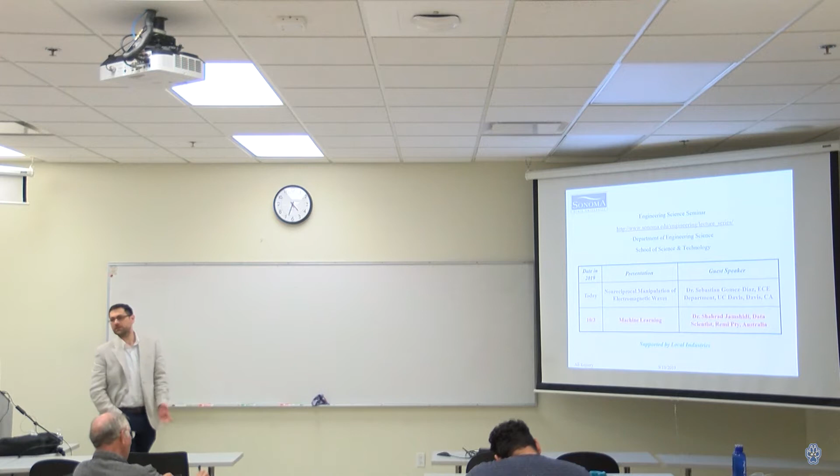Thank you very much, Dr. Kujuri, for this very nice introduction. Thank you all for coming here. My name is Sebastian, I'm assistant professor at UC Davis, and I'd like to talk today about the type of research lines we're working on in my research group. Most of what I'm going to present has actually been done by my students, so I'm just trying to help them around. I also want to make this talk pretty interactive, so if you have any questions or curiosity at any time, please stop me and I'll be very happy to talk or try to clarify.

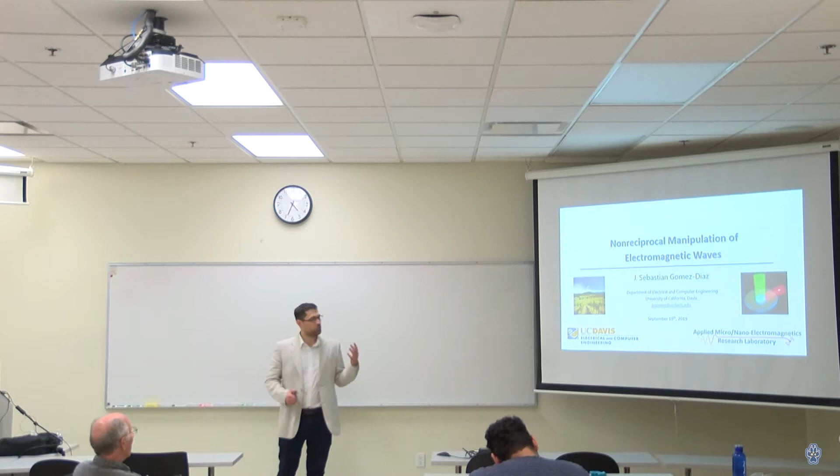What we're trying to do in my research group, one of the major research lines, is to control and manipulate non-reciprocity. Why are we doing this? Right now, most communication systems are not full duplex, meaning you transmit at one frequency and receive at a different one. All of you have a smartphone, and in it you have one antenna operating at one frequency to transmit and a different one to receive. That's because you cannot integrate a circulator to isolate these two antennas, since it requires a magnetic field. That means we are wasting a lot of electromagnetic spectrum, and we are not achieving full duplex communication.

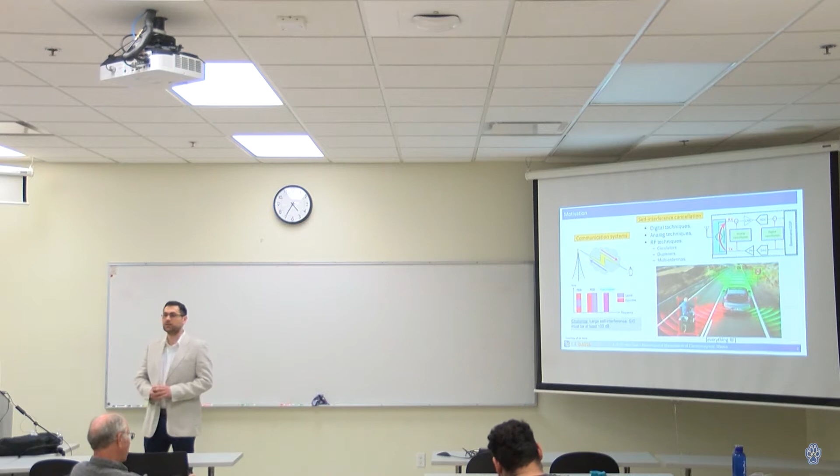Also, with more powerful radars, there is a lot of crosstalk between antennas. And if we look at the bigger picture, we are coming into a more modern and interconnected world and life where we're going to have electromagnetic waves everywhere surrounding us. The way that we control and interact with the electromagnetic wave is going to define the functionalities, the data rate, the connectivity that we have—not only for our smartphones, but for satellite communication, sensing, detection, inter-chip communication, everything.

So what we're trying to do is achieve better control of this electromagnetic wave in ways that so far are not possible. And waves can be in a broader spectrum—we can talk about radio waves, where the wavelength is very large, or we can go to optics and photonics, where the wavelength is really short.

The particular aspect I'm going to be talking about today is reciprocity. What does it mean? It means that in regular media, if I'm able to see you, you're going to be able to see me—this medium is reciprocal. That's good, but imagine you have a very powerful laser and you get a reflection somewhere; the energy is going to go back into the laser, and most likely that laser is going to be broken because you're going to burn it.

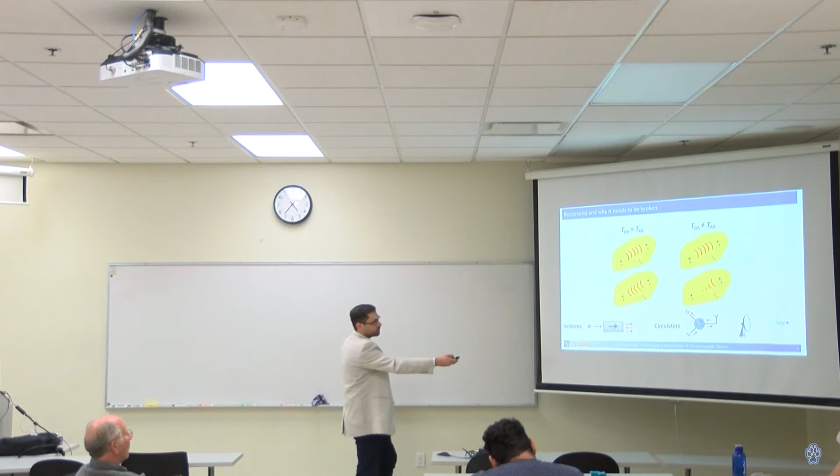Or if you have an antenna system and you want to transmit, but you are also receiving energy, you need to go through a circulator, otherwise you're going to cancel, you're going to have a very strong interference. Or for instance, if you have a primary radar system, when you send some energy, it's going to be reflected off the object you want to detect. If you have a lot of interference nearby, you're not going to be able to detect that signal. Or if you have a jamming signal, someone who really wants to disturb your communication system is going to put a lot of power in, and that's going to block your device.

Or if you have an antenna on top of a roof where there are like hundreds of antennas, they are going to interact with each other, and maybe you'll still be able to transmit, but you're going to have a lot of cross-coupling.

So there are many situations where it is very important to be able to transmit from A to B and not receive from B to A, or at least to tame or control that, not let it be something fixed. So what we want to do is control and manipulate that. That's going to be the major motivation of my talk. How can we do that?

What are the normal ways to break reciprocity? For many years, people have been using magnetic fields. You apply a static magnet, and then you align all of the electrons that are spinning in the atoms along one particular direction, and that works pretty well. They work really nicely, and we have circulators, radars, most components with magnetic materials in them. But we have a major problem.

You cannot put these magneto-optical materials in your smartphone. You cannot integrate or miniaturize them, because they are not compatible with integrated circuits. So one of the major goals in recent years in the literature and in the community has been trying to find ways to do what the magnets are doing, without any magnet. How can we do that?

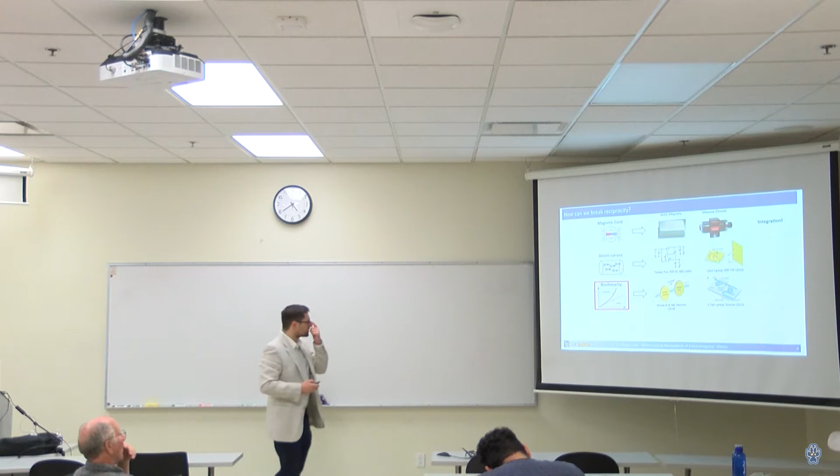And very recently, there has been a lot of trend around what is called linear or angular momentum. In order to explain this concept, I like to show this image. The origin of this concept was, apart from some theoretical works from some years ago, something very simple that happened when I was doing my postdoc in Austin.

They wanted to make a circulator in acoustics, because there was no circulator for acoustics, just a pressure wave. So what this guy did, one of my friends, who is now a professor in Europe, is he put three CPU fans that cost him like $5 or $10 inside of a ring and made an air flow. So the air was moving inside. What happened is when the sound wave came in, it just got locked to the movement of the air and followed the flow. That was the cover of Science, and I was there holding that thing in my hand. I was like, oh come on guys, that doesn't look so difficult, I should have had this idea.

But this has much stronger implications. If we can make something appear as if it is moving, we can control the way that a wave—acoustic, thermal, electromagnetic, any type of wave—behaves, in ways that were not possible before. And that's why many people are working on this now.

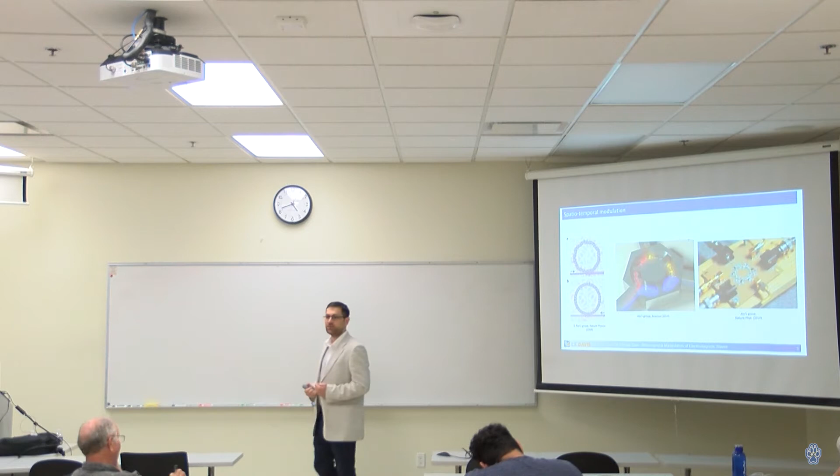I like this very much - how you can take a nice concept from acoustics and apply it to electromagnetics. I also know people now using this in thermodynamics. You can borrow from one field and apply it to a different one. It's great how much you can learn from all of these things.

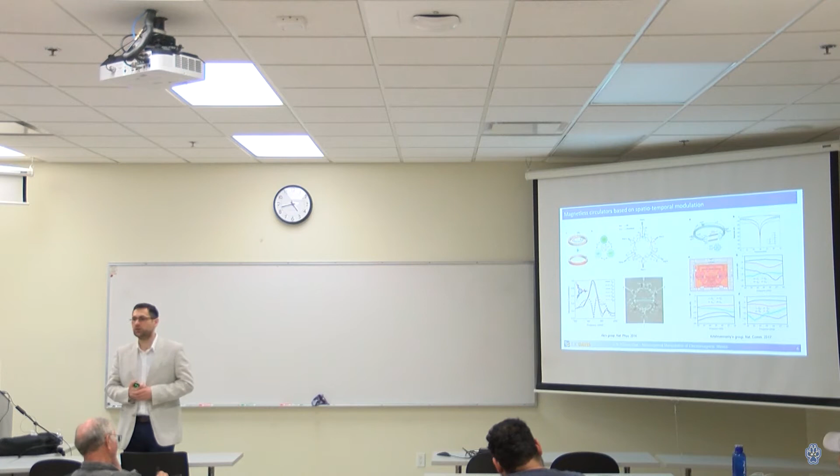Many recent works are going in this direction. People working on this came up with smart ways to modulate all these varactors and capacitors in order to reduce loss and increase isolation between the different ports of the circulator, and there have been CMOS implementations of that. In all cases, the same goal persists: build circulators that could be integrated into your smartphone without magnets. That's how the state of the art has progressed over the past year.

So what are we doing in my group? In my research group, we're starting from that concept and trying to extend it to a much broader aspect. We want to control electromagnetic waves, breaking reciprocity, and apply it to a wide variety of devices.

Circulators have already been done, but if we stay at microwave frequencies, we can make metasurfaces that interact with light in one way - but if light comes from a different direction, it goes somewhere else. So you can have lenses that focus in one direction but not the other. Or phased array antennas - some antennas able to radiate but not receive, or radiate in one direction and receive in a different one. This gives you many more functionalities. You can also have filters that act as a bandpass filter in one direction and an isolator in the other, from the same device.

This is the first block I'd like to talk about - microwave devices. These could be relatively simple, like simple PCBs that can be fabricated pretty easily.

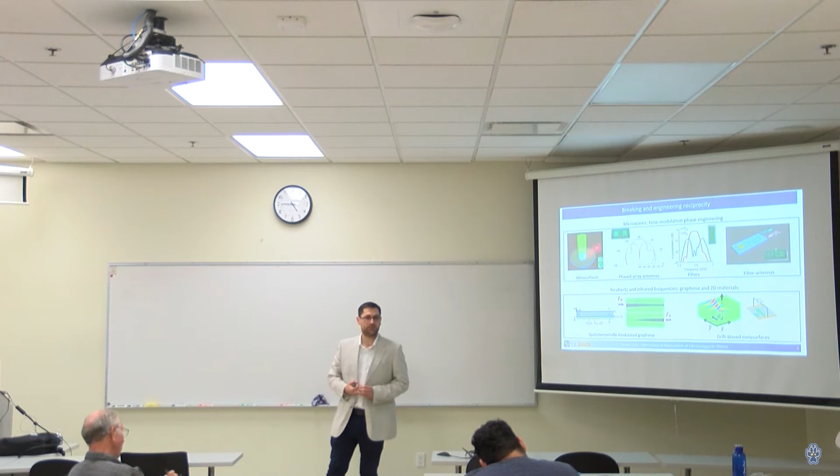The second block is about how we can push technology higher in frequency. As communication data rates increase and we need more data, people are pushing up the frequency range. There's a lot of communication happening at terahertz and infrared frequencies, and there are novel 2D materials like graphene, black phosphorus, and hexagonal boron nitride that have new properties. In this block, I'll tell you about the latest research efforts going in that direction to take advantage of these novel 2D materials with new physics, but with the same goal - getting rid of the magnet and achieving this type of functionality. So this is the context of my work.

Before we start, I want to briefly talk about two concepts. One is called the Aharonov-Bohm effect. Has anyone studied that in physics?

Okay, so imagine an electron going very close to a region where you have electric and magnetic fields inside, but outside these fields are zero. If you use classical electromagnetics, you'd assume the electron shouldn't be affected. However, if you consider the potential around these materials and do quantum mechanics analysis, the electron acquires a phase that depends on its trajectory - whether it goes in one direction or the other. This looks kind of weird. Let me try to explain it in a different way, in an easier way.

The second way this effect has been demonstrated is for photons. Before it was for a single electron, now we have it for photons. The way to explain it in this second way is that if you have a system with two states, and you want to go from one state to the other, you can do that by modulating the system, for instance with acoustics that make the system move around.

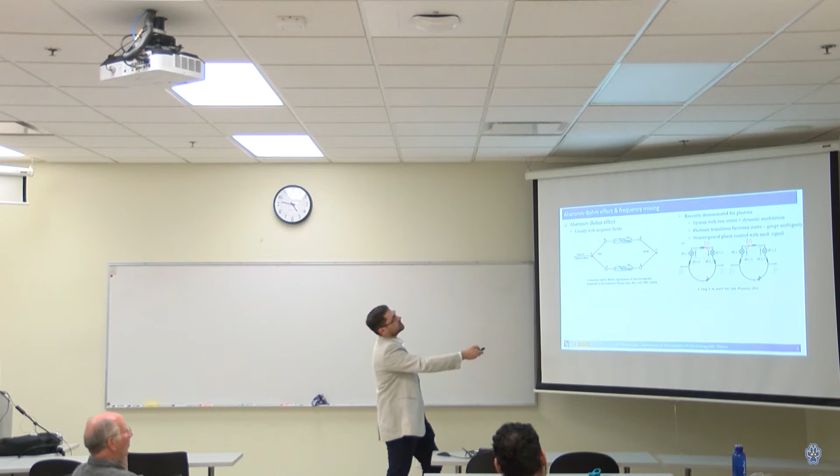But then we have a problem: what is the origin of the phase? That's going to depend on when you start the time of the modulation, and that's kind of arbitrary. We don't know. There's what is called gauge invariance, but I don't want to get into that. So if we analyze going from one state to the other and back, we're going to have some non-reciprocity in phase.

After all these things from physics, I thought this looks very complicated, and then I just went to a very simple frequency mixing explanation. If you have two signals and multiply them together, they're going to have some phase dependence. When you combine one frequency with another, they can sum, and the phase is going to be the sum of these two phases. But for the other nonlinear term, the difference component, the phase is going to be one minus the other.

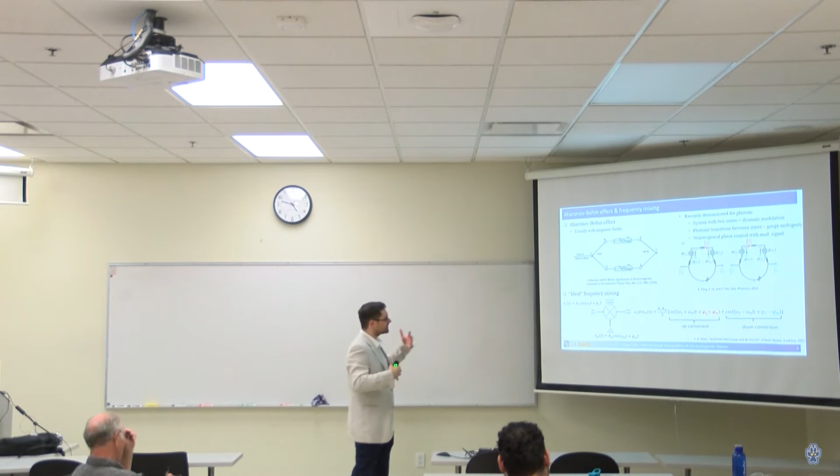So the connection with all these complicated quantum mechanics things, once you understand them, is that they're explained in a weird way, but at the end it means that if you are modulating any system, you are just changing this phase, giving you an extra degree of phase control of your system. This was like a parenthesis, because I'm going to use that later, so I just want you to remember a bit of this effect.

So let's start talking about how we can control light in a non-reciprocal manner. There have been some seminars before discussing how to control light with metasurfaces that are very thin, controlled through several unit cells, like reflectarrays. For instance, some of these structures fly on satellites combined with solar panels, so they can also behave like big antennas. You can control things at the nanoscale if you have control over the different angles. There's been a lot of work on that.

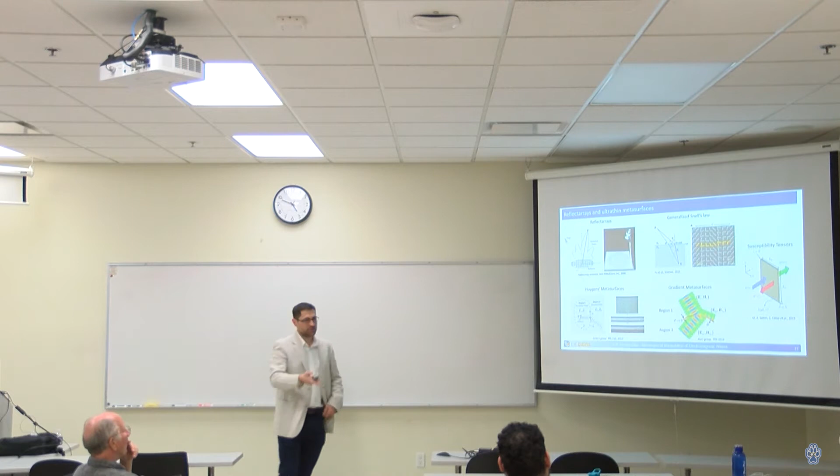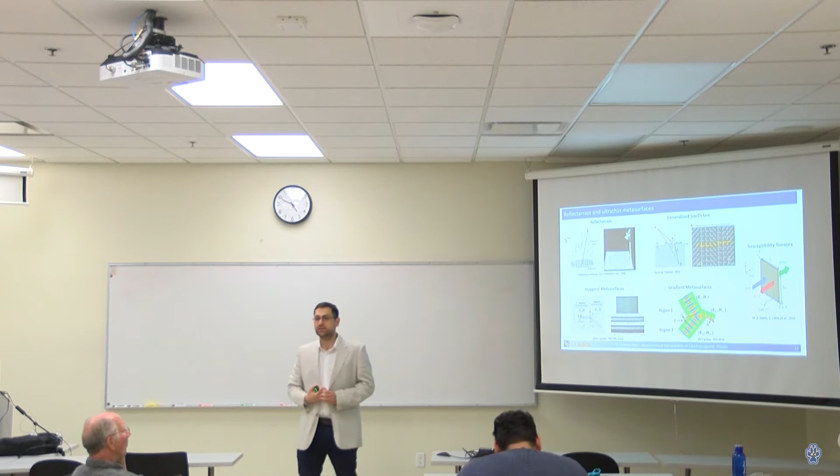For instance, Professor Salem here is very well known for establishing some of the analytical approaches to analyze these types of surfaces. And very recently, people are taking these capabilities to control the direction of propagation of light through this interface and moving into time modulation. What happens if we have an interface that is changing with time?

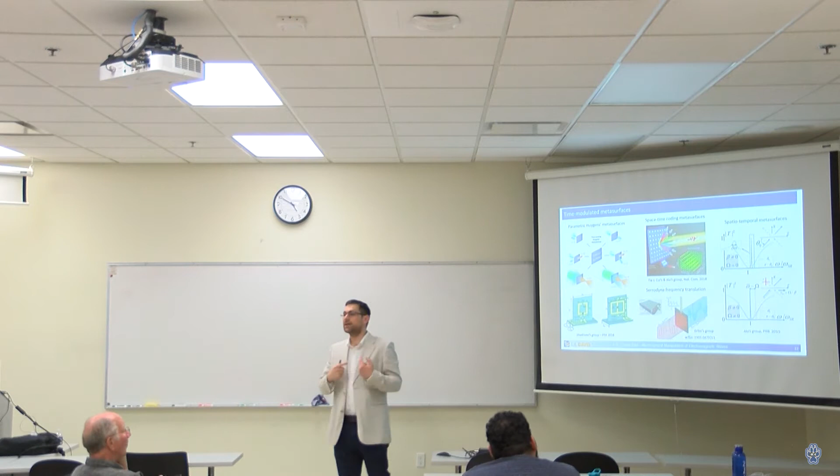So what people were able to do was have light coming from one direction and have it converted to a different frequency, or control one frequency conversion with a particular phase, or control all the different harmonics being generated, or even have a bunch of functionalities. All of these things point to one concept: we want to control light with these surfaces, applying not only a spatial variation of the different elements, but making the system move. That enables new options that we didn't have before.

And that's the key thing: you can take any device you're working on and imagine what happens if some part of the device was physically moving. You can always implement that using a varactor or any nonlinear component. So what are the implications of that? In my group, we were trying to understand what we can do with that.

For instance, we came up with this concept of non-reciprocal metasurfaces, where light coming normal to the structure is refracted in one direction, but when coming from that direction with that frequency, the light behaves differently. So for instance, if you have a reflector tracking a plane and sending information, like in a primary radar, but that plane sends a lot of energy to destroy your system or receiver, all of that energy is going to be reflected somewhere else.

Mathematically, and this is one of the very few equations I'm going to write, what happens is that each of these unit cells can be assumed to be a capacitor that is changing with time, like a simple varactor or diode that you can modulate. This capacitor changes with some frequency and phase, and all the light coming in scatters with different frequencies and to different directions, which is kind of complicated to analyze, but it gives us some basics.

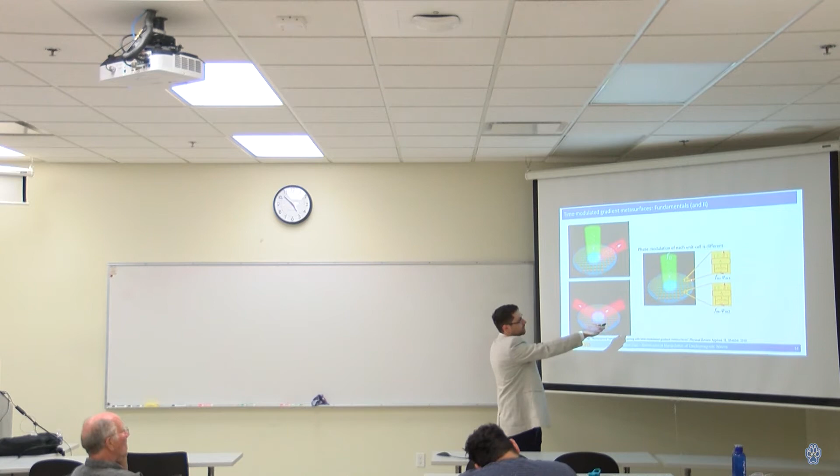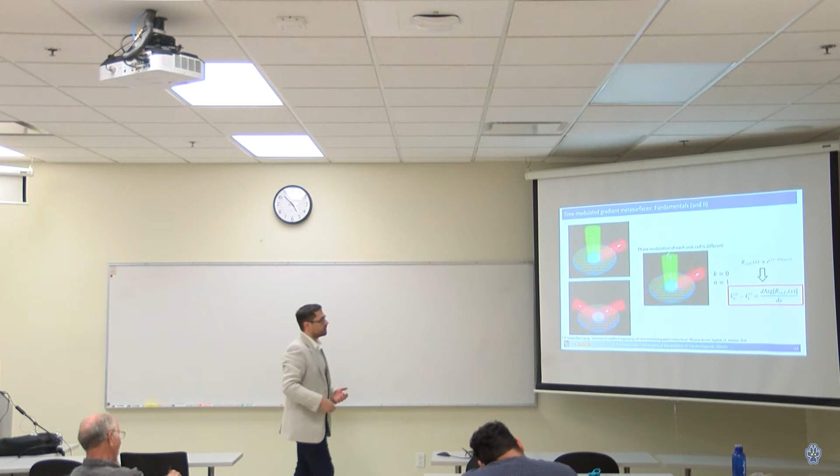What we were trying to achieve is the following: we want to take this frequency and convert it to only one other frequency, the one we actually want to radiate, and control the direction we send it. To do so, since these are unit cells being modulated, we can control the phase of that modulation. Using the concept of going up or down being plus or minus, if we control the phase of this varactor oscillating at a very low, cheap megahertz frequency, we can engineer the light to go in any direction we want, just by controlling that low frequency phase.

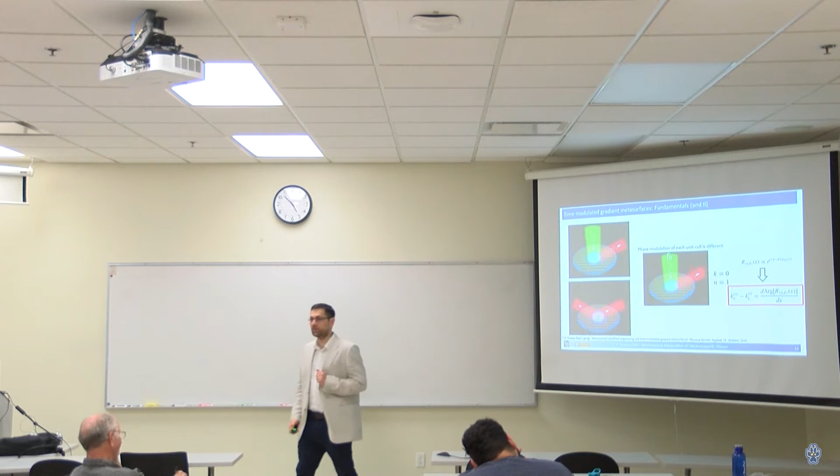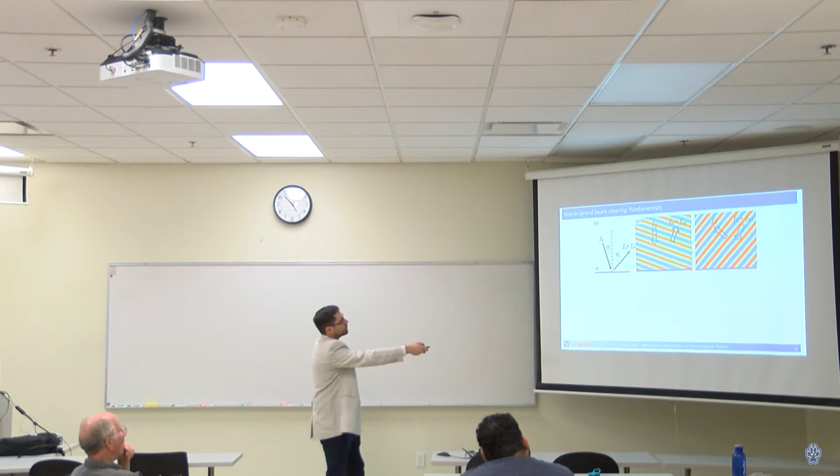If we want to understand this a bit theoretically, here we have this surface. Later I'll show you some experiments. If light comes in and this surface is modulated with some space, time, and gradient, we're going to reflect the energy into that direction. But what happens when energy comes from that direction instead? Exactly the same, but reciprocally, it goes with a different angle towards the other direction.

That's the concept. What happens if we push this further? We can change the modulation of this layer so all the energy coming from this direction goes really close to broadside. When the energy comes back, it cannot go under the surface, so you create what is called a surface plasmon—the energy gets trapped in the surface. That means you can engineer and control the light as you want.

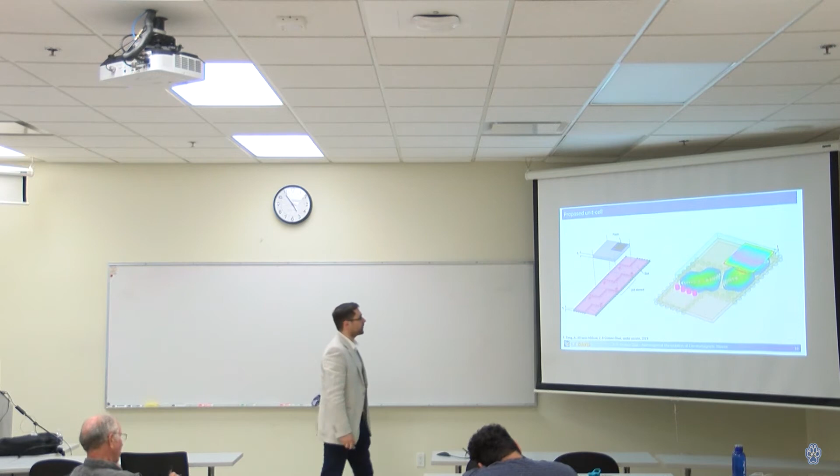We did all of this in simulation with the computer, and we were thinking, how can we do this in practice? It doesn't look very complicated. Then one of my students—because they are all great—came and said, let's modify these cells that you were working on for something else. If we can change these unit cells and make them dynamic, this is going to work.

The initial idea he had was: you have a simple patch, energy comes from the patch, enters through the slot, goes in that direction, is reflected back, goes up, and is radiated again. All of this path picks up some phase. If we can change the position of this path, we'd be able to control that phase. But if you fabricate all of this and try changing it mechanically, that will never work.

So we said, let's just add a simple varactor here. We take one of these pins and connect it to a very simple varactor—like a capacitance that changes with voltage. We apply a simple voltage, and we realize that for the frequencies they were coupling, we can control the phase however we want, and we have huge control over the phase.

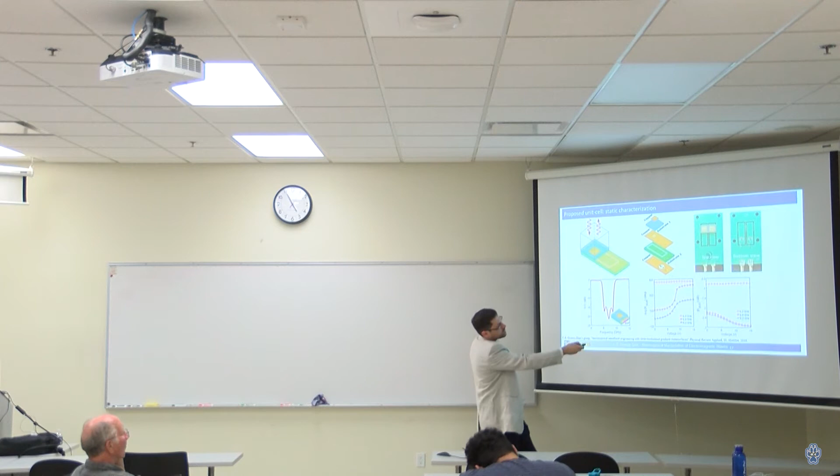So we feed this with some frequency, and we were able to go, for instance, from 9.2 to 8.6 frequencies, controlling the phase. This is exactly what I was discussing before: if we can control the phase of a very low frequency signal—like in this picture of the prototype, around 500 megahertz—we can control the phase of the entire thing, even at X-band, like 10 gigahertz satellite communication frequency. So what we were doing was only controlling the phase of the very low frequency, and through that we control the phase of the entire system.

That was one ingredient. The other one is that we want all the energy we put into the system to get converted to the other frequency that we want.

Playing around with the system, we managed to get over 10, 15 dBs of conversion. So all the energy that we put inside is going to the frequency that we want.

So what are we doing right now in this project? We're building an actual reflective radio metasurface that is going to have like 200 unit cells, because before we built a proof of concept with a single unit cell, so we know this is going to work. Now we are building the actual structure with over 200 cells.

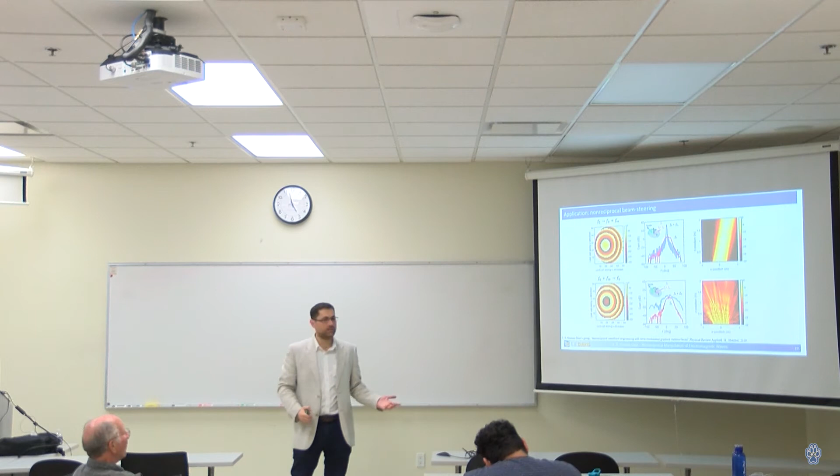But what happens in the opposite case, when the energy is coming from the same direction that it was radiated? In this case, all the energy is going to be scattered around. So what we want is, if we have some interference or jamming signal that wants to destroy our system, we're going to scatter all the power. We are not going to focus it into the receiver, so we're going to be able to handle that jamming signal in a very nice way.

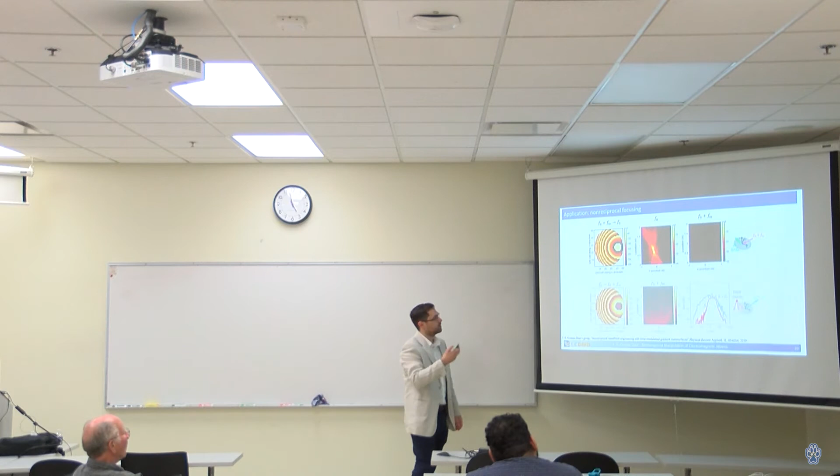We can use exactly the same system to have all the energy focus into a single spot, and when you are radiating from the spot, it's not going to radiate.

Now you are saying, yeah, this is very nice, but it looks very complicated to design all of these types of functionalities over this structure. Well, even though these results are at very high frequency, 10 or even higher, our control is over modulation frequencies of a few megahertz. Those are very simple and very cheap to control. So it is very cheap, low loss, and efficient to design 50 or 200 of these cells and control light as we want.

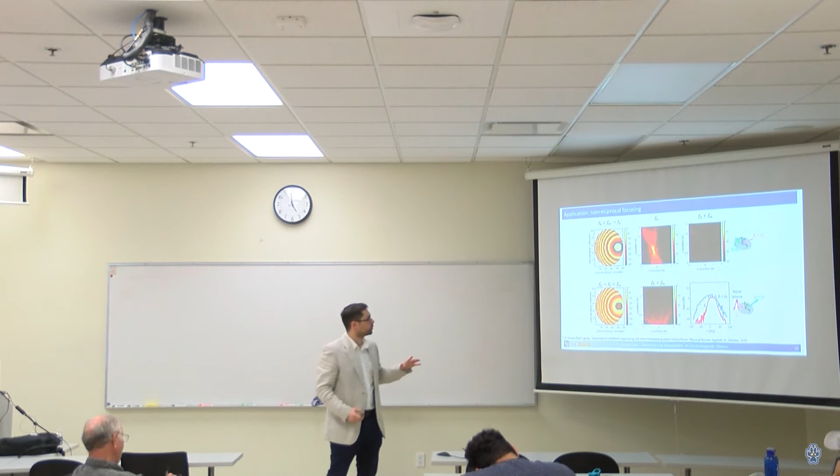So this is one way, and to my knowledge, the first proof of concept to control light over a surface independently. We can control transmission and reception, and we were interacting with beams in free space.

So that was the first project, and after we learned from that, we were saying, but what happens with communication systems like 5G, 6G, with these phased array antennas that are tracking you? Most of the antennas are not actually interacting with beams from free space. They are something that you have in your smartphone, and they are radiating.

And in new communication systems, what it's going to have is some very well-defined beams that are directed to each one of you. The concept of a phased array antenna is kind of simple: you have many antennas in a periodic arrangement, and you're controlling the phase of all of them.

Then you have some interference pattern, so you can send this to one particular direction. If you control the phases of all of these antennas, then you can send it to any other direction that you want. Why is this useful?

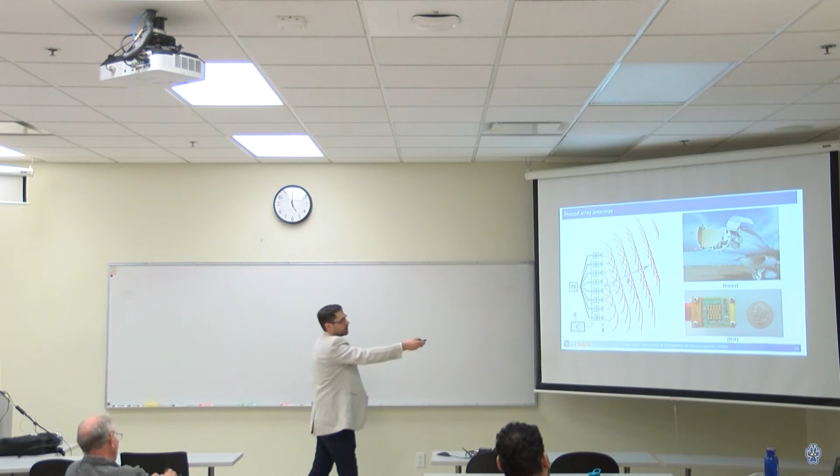Well, for instance, on a plane, you have radar made of this phased array antenna. Some time ago, most of these radars were mechanically moving, so if you see things that are always moving, that's a radar. But here, it's static, not mechanically moving. You just change the phase, and the same structure is able to track, changing very quickly, in milliseconds or probably quicker, what is going to be the direction of the beams.

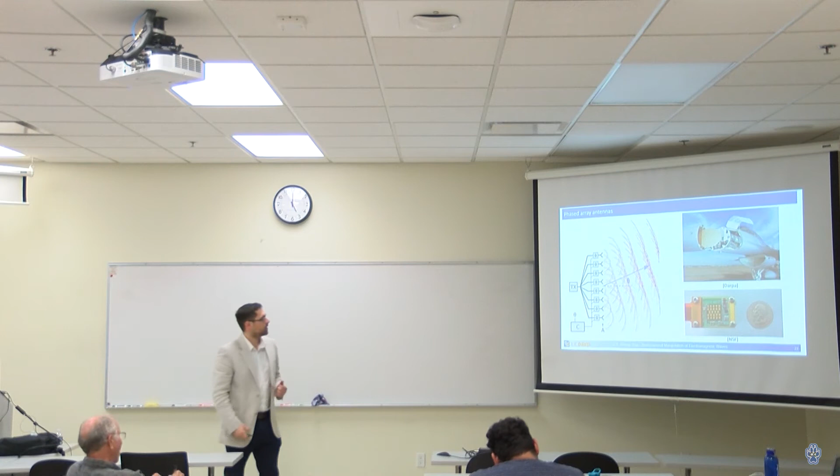But again, these phased array antennas are bounded by reciprocity: you transmit here, you receive from here. And this is what we want to break. How can we change this structure to have a non-reciprocal phased array antenna? My goal is to transmit the energy there and maybe receive from a different channel in a completely different direction in space. How can we do that?

We came up with the possibility to build non-reciprocal phased array antennas. We want to have an antenna that is modulated in time, as we have been discussing before, and it's going to be able to radiate with some particular phase due to the mixing of these two signals, and the phase of the radiation is going to be controlled by the phase of this modulation signal.

So if we do that, and we're able to do that very efficiently, we're going to control all of the radiation pattern of this phased array instead of using the frequency we're going to transmit, something very low frequency, at megahertz, something easy, cheap, and affordable and effective.

What's going to happen in reception? Well, it's going to be the opposite. We're going to receive exactly the same frequency in space, but due to the frequency mixing, this phase is going to be a down conversion. And if you remember from what we discussed some time ago, the phase is going to be opposite. That means the phase you're going to receive here is going to be different, and the interference pattern you're going to have in transmission and in reception is going to be completely different.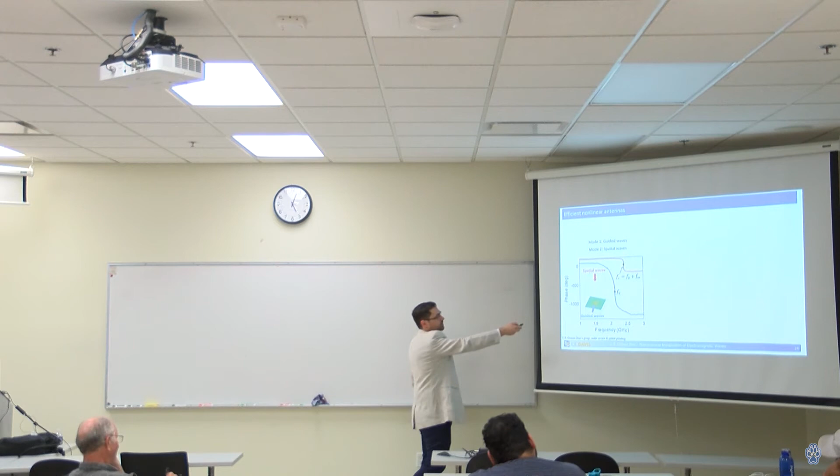And if we apply some modulation again, we want to time modulate the system, we want to go from our guided wave to the spatial wave, and then this modulation frequency, the phase, is going to control that. And again, when we were looking at that, it was like, yes, it sounds very good, but it looks very complicated to do. I want to do it in a very simple way.

So we came up with a very simple structure, like any dipole or patch antenna, just a half wavelength, and it resonates at one resonant frequency. It's kind of simple. But what happens with that simple structure if you feed it from both sides simultaneously? So you have your resonator, your dipole, and you excite from two sides. Well, this resistor models the coupling to free space, and you have like two resonators.

If you feed out of phase between one port and the other port, you are going to excite the resonance of your dipole antenna, and all the energy is going to be radiated to free space. But if you feed in phase, 0 and 0 phase on both sides, well, both of them are going to interfere in the center, and they are going to be reflected back, and the energy is not going to be radiated.

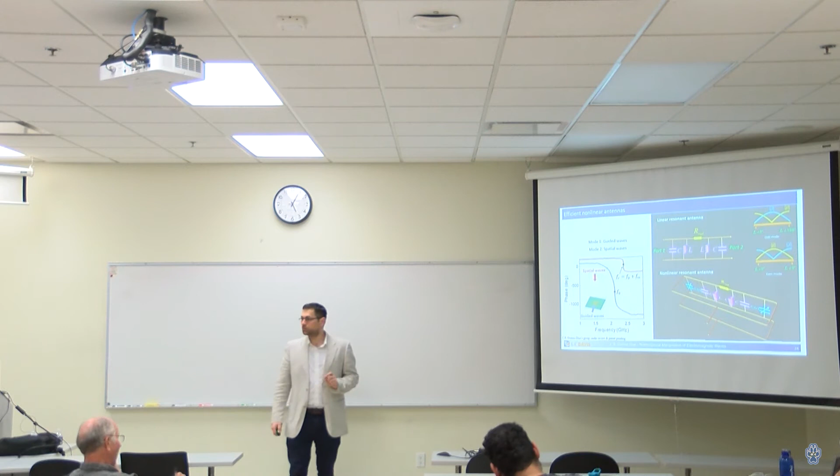So our idea was, okay, let's take any simple resonant and linear easy dipole or patch or resonant antenna, let's feed it symmetrically from two sides, and let's make this capacitor variable. If this works, we should be able to transmit and receive frequencies while fully controlling the phase, and therefore we should be able to construct our phased array antennas.

So we came up with something really, really simple. A patch antenna, like a dipole, and we feed it from both sides, like this. And we apply here a varactor exactly the same way as before to have some modulation. So it's like the antenna, due to the presence of the varactor, is changing in time. If it could mechanically change, it would be like an antenna going stronger, larger and smaller electrically. You can't see that, but electrically it's doing that. Yet it's exactly the same mechanical device.

So we fabricated this and measured it, and said, let's see how it goes. So we matched the antenna and said, hey, this is very well matched. We got a matching of almost minus 40 dB. That was pretty good. And then I was always trying to be picky with my students, because I didn't believe it was working so well.

So I told them, look, if you feed at this frequency and all the energy is fed, how much energy are you reflecting back from the harmonics? And then we realized we are creating harmonics, but with very little power, minus 40, minus 50 dBs. So they were like, okay, you are not creating energy that is reflected back. So what is the energy? So we were feeding this antenna at 2.4 gigahertz, and all the energy was transmitted.

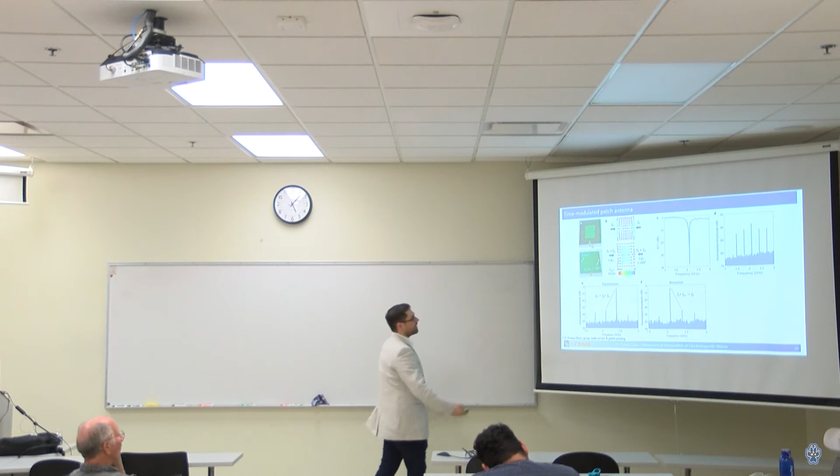And it was working really good. When we were in reception, we were feeding this antenna at 2.4 gigahertz, and all the energy was transferred to the guided mode with exactly a symmetrical nonlinear process. At this point it was like, why am I going through all of this pain to transmit energy at 2.4 gigahertz if any dipole can do that?

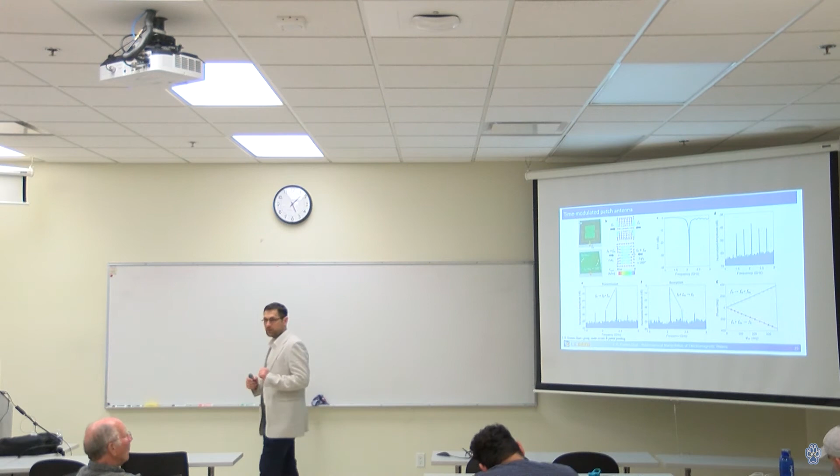Because we can control the phase. When the energy is going in transmission, those are measurements and simulation with respect to the phase of the very low frequency - we were controlling the phase, and the reception in a completely different way. So now we could control the radiation pattern in transmission and in reception independently.

So once it was working, I said okay, let's build a very simple proof of concept phased array antenna - 2 elements, that's the simplest configuration we can have. So we have these 2 antennas, and we feed them with a 90 degree phase difference.

So what does it mean? We have these 2 antennas, and when you are going to transmit, this one is going to always have a phase of 0, and this one is going to have a phase of minus 90 plus the phase of this low frequency phase shifter. When you are receiving, this one is going to be the same, 0, but now the sign of this phase is going to be different.

So they are opposite. Then we went to the anechoic chamber and measured how much power we were radiating versus the power of this phase. When this phase was exactly 90 degrees, the phase of this one is 0, this one is 0, they are in phase, and all the energy was radiated at broadside, perpendicular to the antenna, and we got a maximum. When this phase was 270, this one is 180, so they were out of phase. The antennas didn't radiate - well, they radiate minus 45 dB, basically nothing.

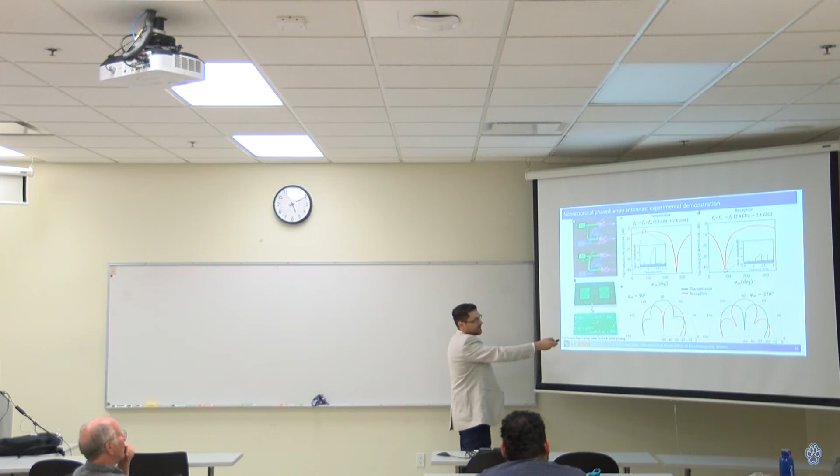We then measured the entire radiation pattern, and we realized that we are able to transmit in the direction we want, and then receive at exactly the same direction with the same antenna, 44 dBs lower in energy, and that was huge. The fundamentals of phased arrays hold the same, so if we just change these phases, we also measured tunability, and we can control each of these radiation patterns independently.

Why could this be useful? So now we are trying to find applications. The first thing is that our conversion efficiency is virtually lossless - we were able to radiate all the energy because we have these two very strong modes. We are able to operate with a very low frequency phase shifter.

And phase shifters are not the best component to work with - as long as you increase in frequency, you have loss, you have a lot of problems. Those ones are operating at megahertz - you can go and buy a bunch of them for a few bucks. They are very affordable. We can control transmission and reception at the same frequency.

We can deal with jamming signals. If we know that someone wants to block our device, we can just say, hey, we don't want to receive power from that direction. We can operate in electromagnetically crowded environments, like chips, aircraft, ships, or roofs of buildings. For instance, we're working on sensors that are able to measure electromagnetic fields without disturbing the fields being measured, because we have this non-reciprocal response.

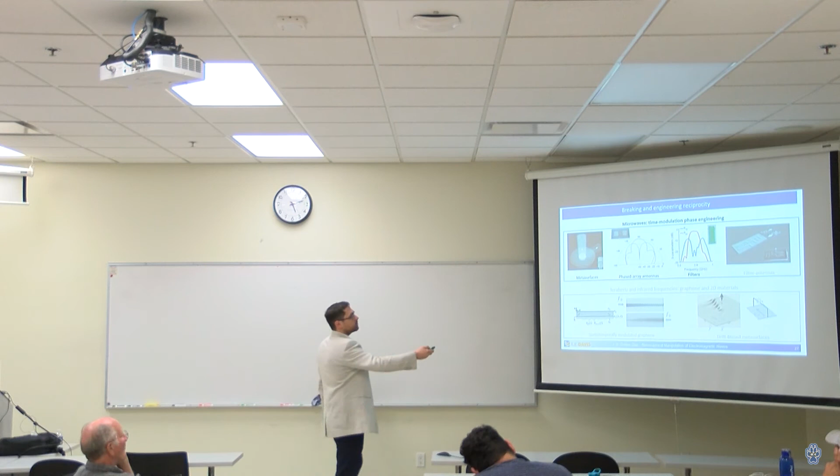Our next concept is, okay, maybe we can apply this concept to a filter, like a standard filter. The filter is, at least when I was a student, one of the first things we studied, like inline filters. You have several resonators all together, and they can couple. This is, for instance, the so-called inline coupling.

So you are pumping energy from the source. This is like a very large filter for space technology, but the concept is kind of simple. You have a source, and several resonators that are coupled, and then you have a load. When you have a filter, some frequencies are transmitted in one frequency band, but not transmitted in the other. So it's like a regular filter, and all of you have many in your smartphone, on TV, everywhere, optically, infrared.

So we were thinking, how can we apply this concept to have filters that are able to transmit the frequency we want in that band, but they are not going to be able to receive anything. For instance, in the case of the laser example I was telling you before, we are able to send that energy, but when it's reflected back, it's automatically attenuated without any other isolator.

So we extended it, saying, okay, the simplest way to do that is to time modulate these resonators. The math is a little bit convoluted, but once we got a clear picture, here's what happened: each of these resonators in time domain creates many harmonics in frequency. When you're pumping, the energy can go either to the next physical resonator at the same frequency, or to a different resonator at a different frequency within the same physical resonator. So we have a coupling scheme.

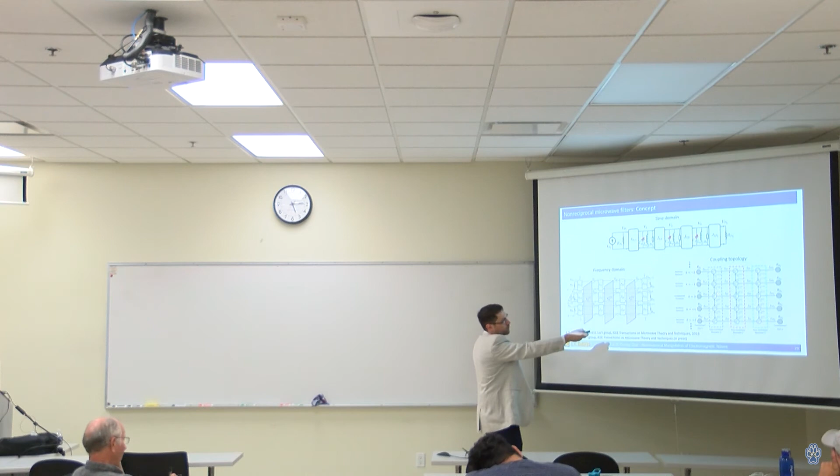Again, the key of these non-reciprocal filters is the phase. When you're going from this resonator, within the same resonator, to a different frequency, the phase of this coupling is different when you're going up and down, due to this Aharonov-Bohm effect I mentioned before. So this coupling is going to be positive, frequency up conversion, and this other coupling's phase is going to be negative. After studying all the math, I was like, yeah, let's fabricate this. This is going to work, or not.

And we built very simple microwave filters, saying like coupled line, coupled microstrip, low quality factor resonator because it's this type of technology, and we applied the same varactor technology, and then we have a bandpass filter with 4 poles.

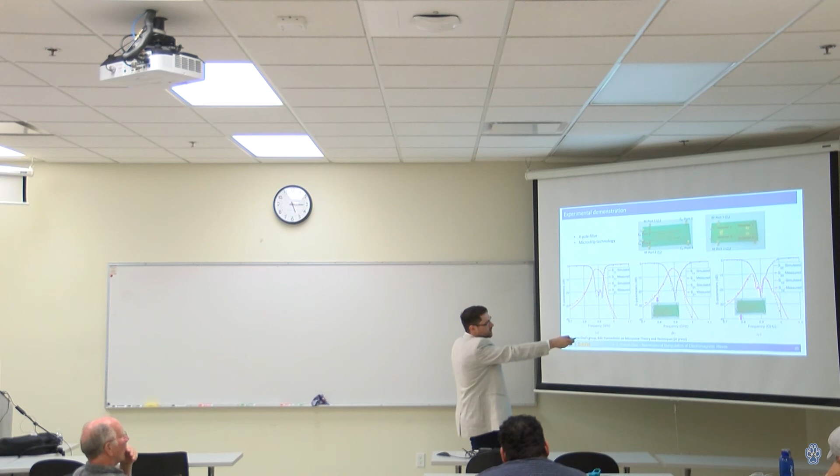When we were measuring after applying time modulation, we have our filtering response in this direction. We got some extra loss because we didn't consider well all the loss from the varactor, but we're going to fix this in the next round. And when the energy is fed from the other direction, we got an isolation of over 20 dBs. That was our first ever proof of concept of this type on a non-reciprocal bandpass filter.

So now we are able to send all the energy in one direction, but we are not able to receive that at the frequencies we want. Again, all of that is enabled by controlling the phases employing these varactors to modulate the resonators. The way you can think about it is like you have a resonator that is changing physically in time as you apply this modulation signal.

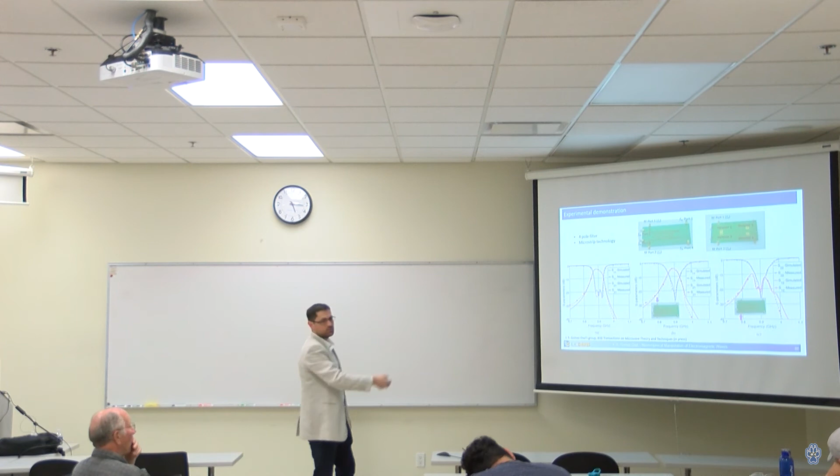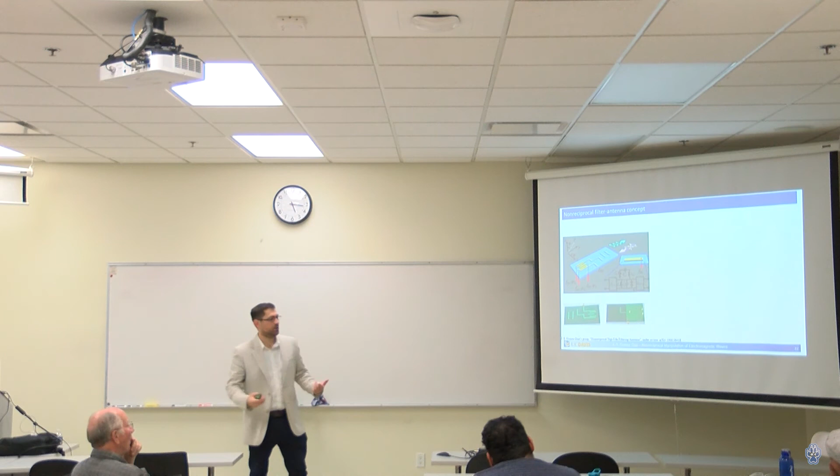The very short project we just finalized was actually the idea of one of my students, who wanted to incorporate this into a simple Yagi antenna, saying, hey, we're going to have an antenna able to radiate, and then we combine the antenna with this filtering section, so we're able to radiate at all frequencies in all directions, but we're not able to receive any of that energy.

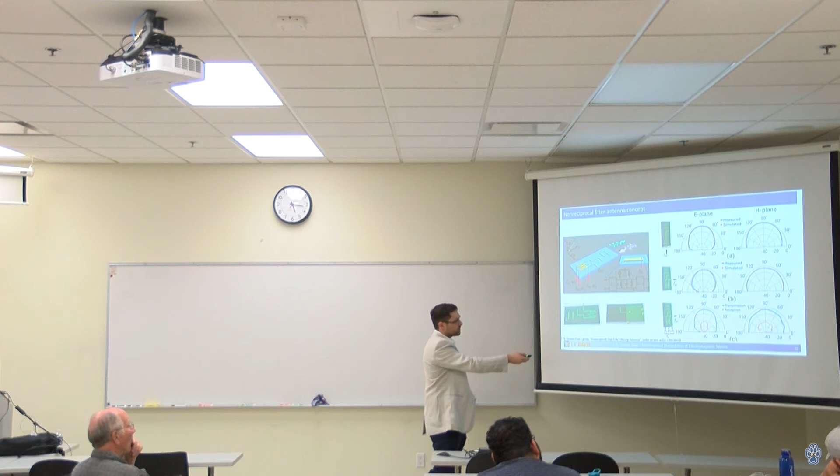That was like a very nice proof of concept, and here they are, the measured transmission and reception radiation patterns. We measured over 20 dBs of isolation. More or less in this block, we were trying to apply this time modulation phase engineering to open new venues, new roads, that hopefully will pave the way to control electromagnetic waves in ways that were unreachable before.

We're also trying to borrow concepts from other domains in order to engineer devices that have new functionalities compared to the ones we currently have. And these devices are relatively simple, or at least much simpler than I ever expected.

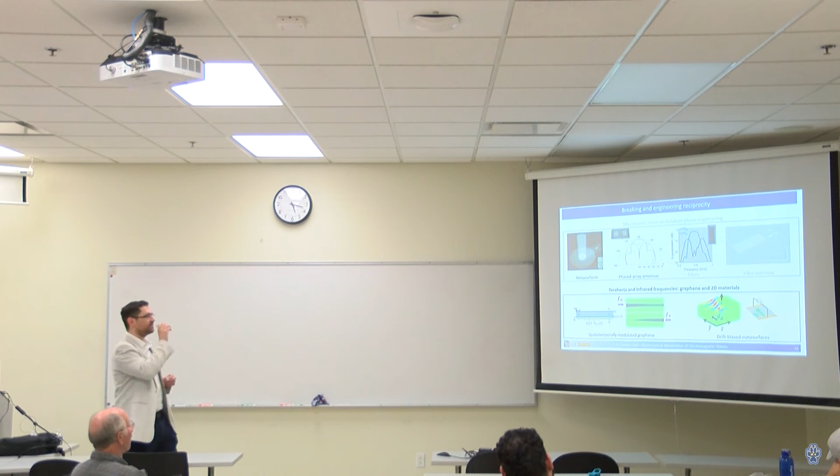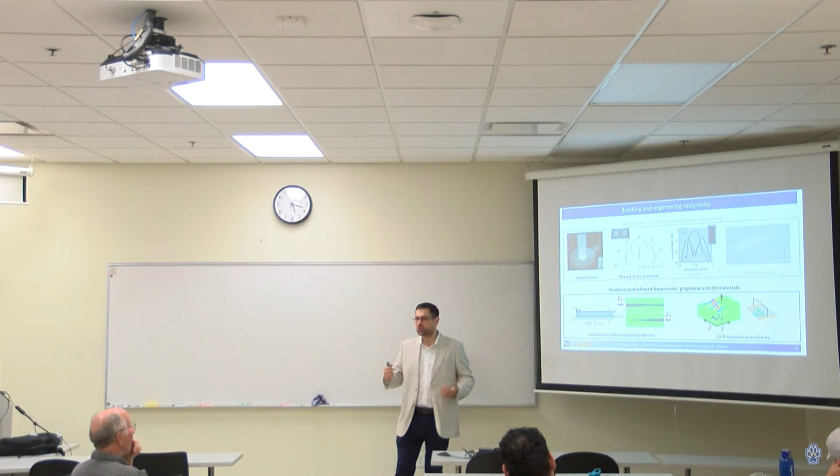Well, in the last 15 minutes, I just want to make a very brief introduction to terahertz and infrared frequencies and how we can use graphene and 2D materials to control electromagnetic waves.

Let me skip this part, and go here. Do you know the guys who discovered graphene? They got the Nobel Prize, I think it was in 2010. Do you know how they discovered graphene?

Tape, and by luck. I'm teaching a course about metamaterials, and Professor Geim, the supervisor of the student, two years before, got the Ig Nobel Prize. It's like the Nobel Prize for the most absurd study, because he was able to make a frog fly, levitate with a magnet. The scientific community was saying, okay, it's very nice, very cute, but what is this for? And then three years later, he discovered graphene.

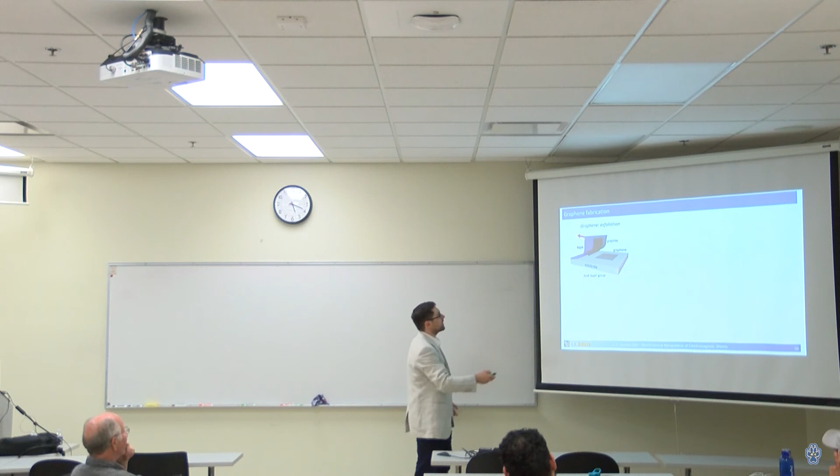How did that happen? They were working on a different project, and they had silicon, graphite, and just some Scotch tape. What happened is that when you exfoliate the graphite with simple Scotch tape, you're going to take all of the graphite with you, but due to van der Waals forces, like Casimir forces, which are really strong at the nanoscale, they were able to attach and get one atomic layer of graphene over the substrate.

Those guys were smart enough to realize there was something new that nobody ever thought was possible: a material one atom thick. They realized, looking at the microscope, that this was completely new, and that it has electromagnetic and electrical properties that nobody ever expected to be possible. In fact, there were many studies saying that this configuration was not stable, that it was impossible to get.

Right now, most researchers are going to the periodic table and making 2D versions of every material you can have, because there's something new there.

The problem with exfoliation is that you do this with Scotch tape and you create some flakes on the substrate. Then you go with your microscope and look at that. But there's no way you can have a device under control that way. So what people are doing is a process called chemical vapor deposition, which is kind of standard now. We can just deposit flakes of graphene, and under certain conditions we can have this layer. The problem with this approach is that the quality is a little lower, but it's still really, really good.

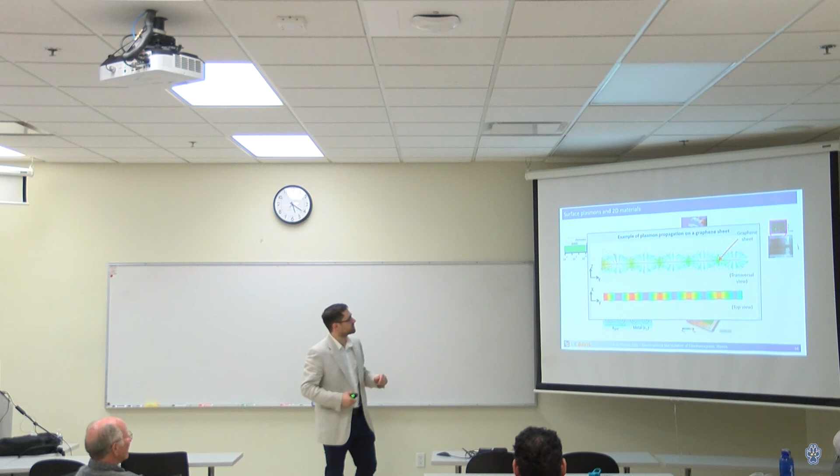One of the things I like to explain is why graphene is so important for the field of plasmonics. Have you ever studied anything about plasmonics? Have you heard about that? Well, plasmonics is a really big deal in optics, at very high frequency, in the visible range.

When you have any metal like gold or silver, the permittivity they have is negative. And if you put gold on top of air, you have positive permittivity like the air, and negative permittivity of the metal. That supports a wave that travels only over the surface, propagating over the surface. That's called a surface plasmon polariton.

So what's the deal with graphene in all of this? It depends on the metal you're using—gold, silver, any material you may have—but they only behave with negative permittivity at very high frequency, and they are very lossy. So if you want to have this type of wave at other frequencies, you cannot.

That was impossible before. One of the big deals of graphene is that it behaves like negative permittivity at terahertz and infrared, near-infrared frequencies, and it opened new avenues of opportunities to control and manipulate light that were not possible before.

One of the major things that has enabled graphene, in addition to these surface plasmons, is that if you apply a very small, modest DC bias, you can change the properties by a lot. So we're talking about a material that is one atom thick, with dimensions of a few microns, that's able to change its properties by 100 to 200% by applying 2 volts, and it's able to open up surface plasmons in a frequency range that wasn't possible before.

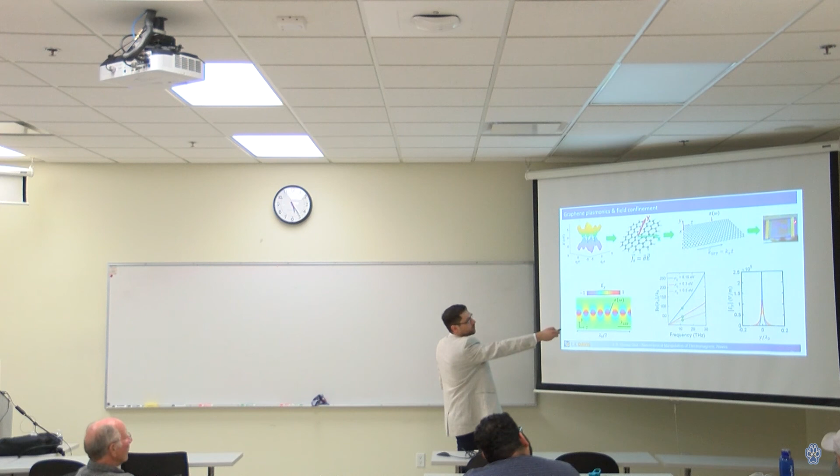In this animation, I want to show you why these surface plasmons are important. This is half wavelength, for instance at 1550 nanometers, a telecom wavelength. If you have graphene, the surface mode supported in this layer is much, much smaller, the wavelength shrinks a lot. So here we have like 8, 7, it can go up to 100, up to 200. That means with only a few micrometers you can have a device that is electrically huge, and you can control and manipulate waves as you want, make an antenna, do the processing, and then radiate, all of that in 1 micron, and still have empty space. Plus it's reconfigurable, meaning if you apply a voltage between this point and this point, you are going to change all of those properties.

So these are one example of a fabrication process that we did some time ago. We have some silicon, we pattern some gold, and we put graphene over a PMMA protective layer.

This is called Raman spectroscopy, so we can use light with very high intensity and analyze the nonlinear response of graphene to check the quality. As a function of these peaks, with Raman spectroscopy, one can say this graphene has 1 layer, 2 layers, 3 layers, and whether it is of good or bad quality.

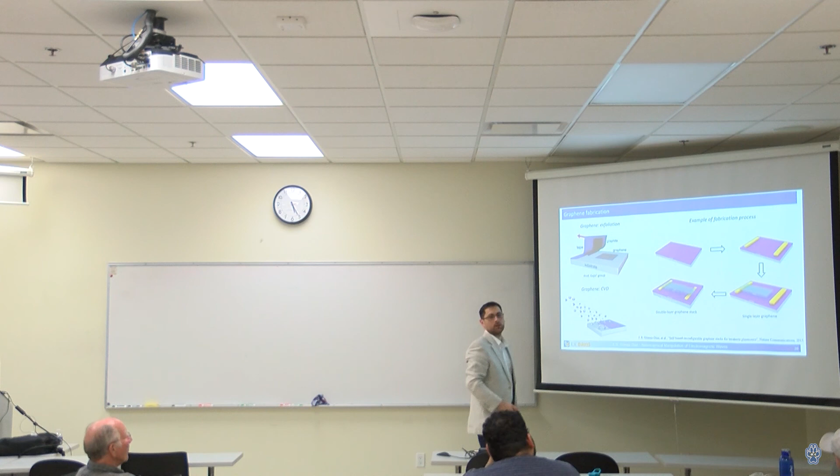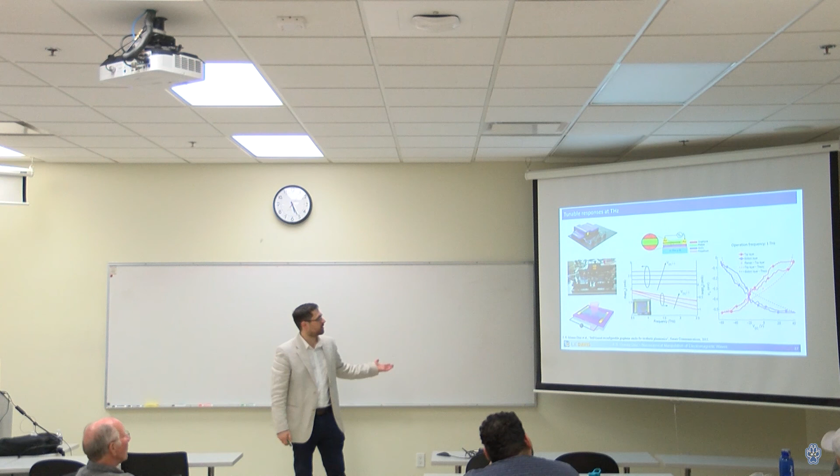In that particular paper, we just controlled one graphene layer biasing the other one, without requiring metal below, because we want to operate in transmission. We measured this at terahertz, using the equipment that we have in my lab at Davis, and we were able to modulate around 80% of the terahertz beams going through, but applying relatively high voltage, 40 volts. In our new samples our aim is to do that at 1 volt, and some reports in the literature are able to do that with 0.5 volts and going lower.

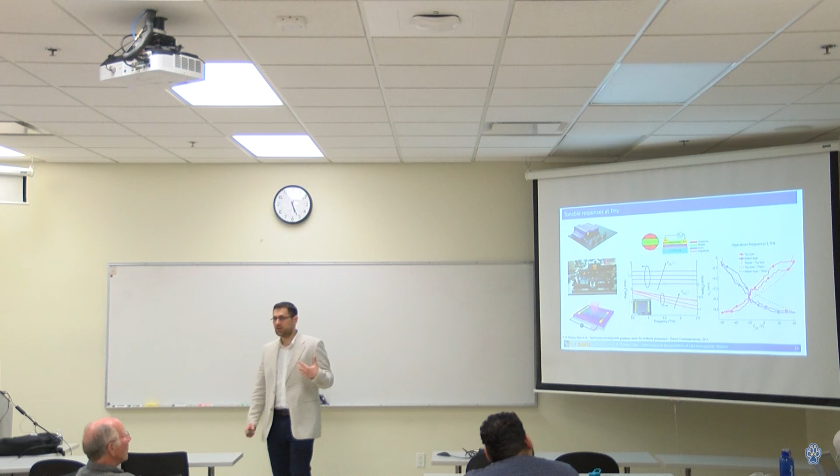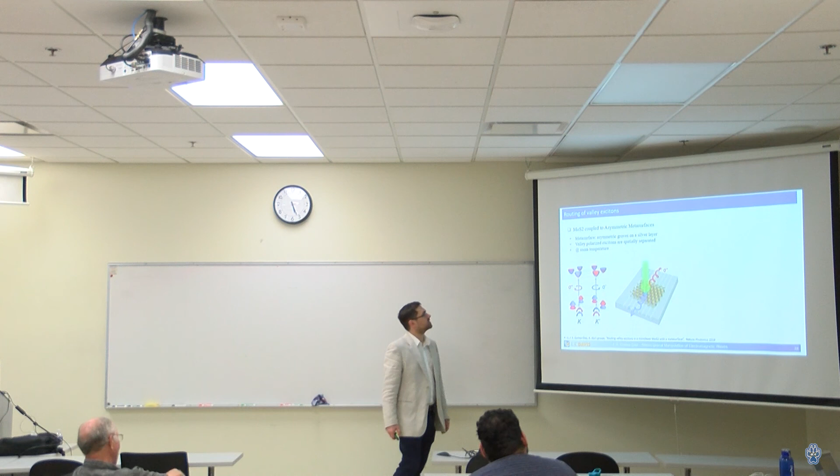This is just one of the many opportunities that graphene enables. For instance, in a very recent work that we just came out with, we were trying to look at the properties of other materials. One of the most exciting is MoS2, which has very strong spin locking and supports excitons, electron-hole pairs that exist over this material.

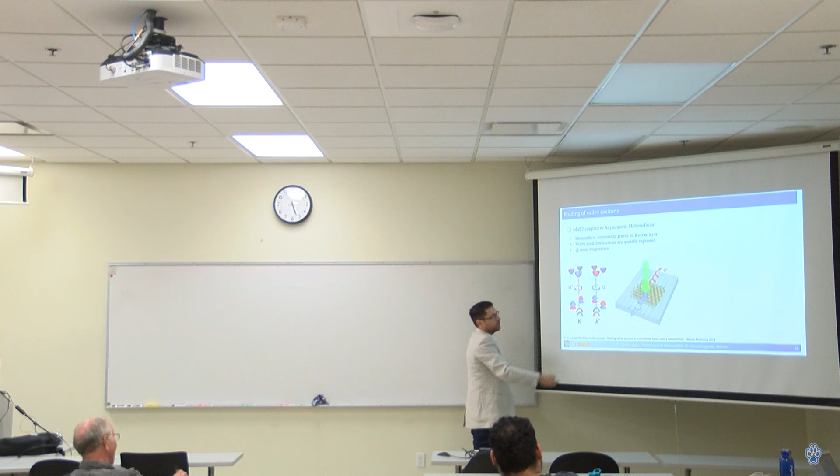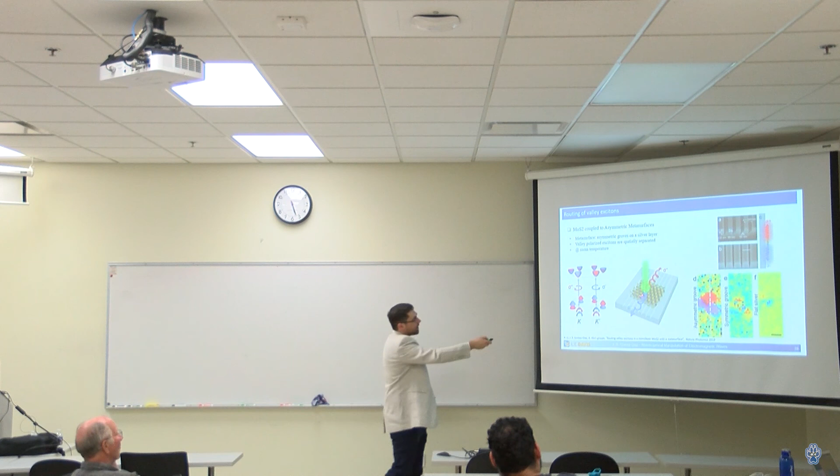So what we did is come in with unpolarized light, and we excite it so that only the light that is right-handed polarized goes in this direction, and the light that is left-handed polarized, the different polarization, goes to the other direction. We measured the photoluminescence and got pretty nice results, but the idea is that just by controlling the properties of a very small flake of 2D material, we were able to control light in ways that were not possible 10 years ago. Nobody thought it was possible.

And this is just the beginning. There are so many 2D materials, so many opportunities to control light and take advantage of the reconfigurability of these materials, that I think the ways we'll be able to make devices, control light, and enhance the data rate of our communication systems are really boundless. I think only imagination can find a way to stop that.